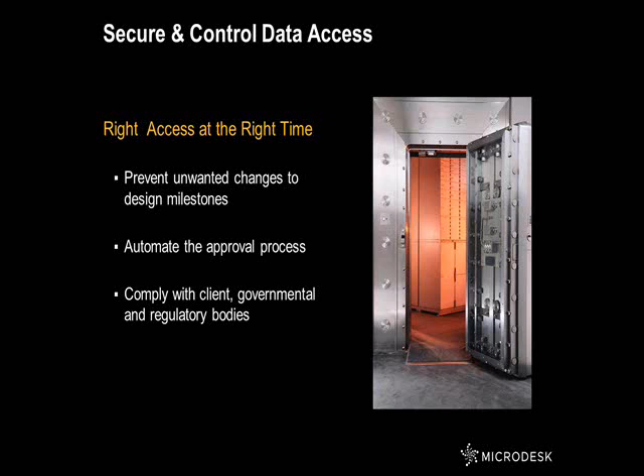The nice thing about Vault is that it centralizes your data. So it's a full data management software. It also integrates into Microsoft Office products, so it's good for not only Autodesk products, but also for all of your Office documents. It's really a whole organization solution.

Now, another thing that has been introduced in Vault Collaboration AEC is the ability to track milestones, so to move through the typical process of a project and actually capture particular milestones. So your 30%, 60%, 90% submittals can all be tracked through Vault.

Now, the other ability of Vault Collaboration is you are able to work across a very large organization. So you're able to replicate information across servers that could be housed in various offices around the country or even across the world.

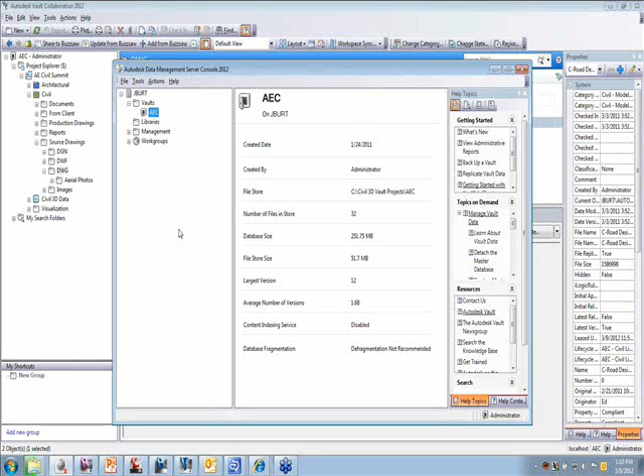Okay, so that's not really the interface for Vault. It's just, again, the admin application. Okay, the next part of Vault collaboration would be the actual client application that gets installed onto each client machine. So this gets installed locally, and it's kind of like Windows Explorer, but it actually allows for better interface with your Autodesk projects. So it'll give you additional information that Windows Explorer would not give you. And as we get a little further in, you'll be able to see that.

Another piece to Autodesk Vault collaboration is Buzzsaw. So when you purchase Autodesk Vault collaboration, you will also get Buzzsaw. You will get 10 gigs worth of storage. Buzzsaw's been around for a long time, but they have built in the integration of Buzzsaw into Vault.

So I can actually use this to collaborate with external clients. I can upload information into Vault and then have the ability for those external clients to grab that information, whether it be a reviewing agency or a contractor. You need to upload plans, and they can download them from Buzzsaw. So that comes with the product.

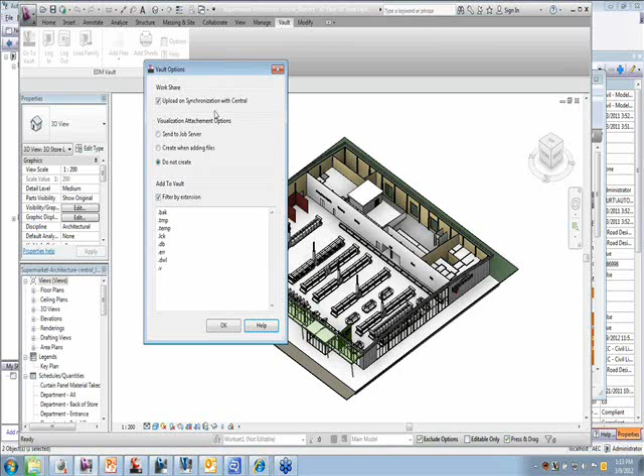Okay. Now, what I'm going to be talking about today is how it interfaces with Revit. So I have a model here, a Revit project file. This project file resides on my local machine, and obviously this would be synced back to my central file. I also have the ability to keep a copy of the central file in the Vault, so by coming into the options here, I'm able to synchronize my central file with the copy in the Vault, so I can house that in the Vault.

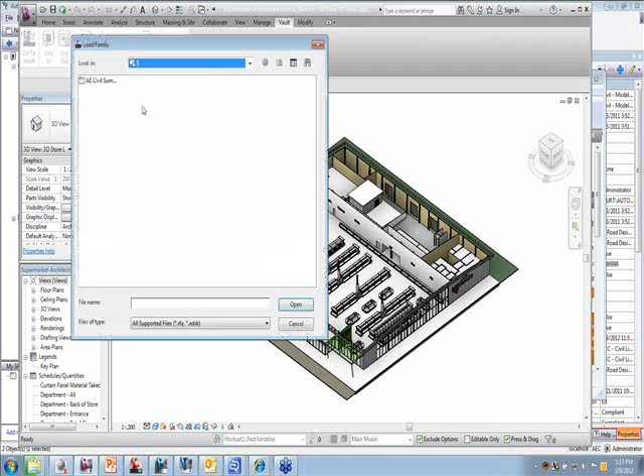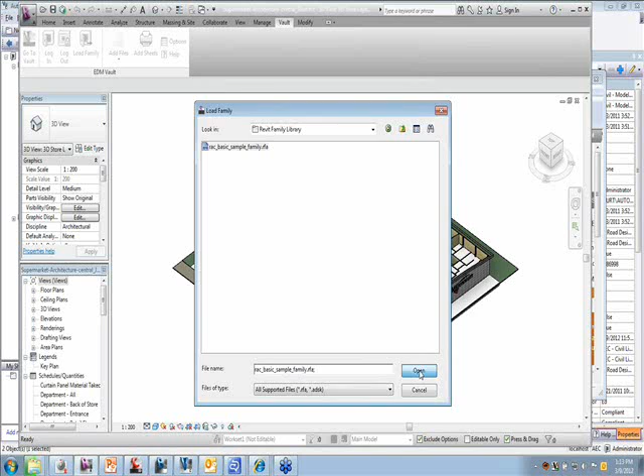I also have the ability within Revit to load families, so I could centralize the storage of my Revit families within Vault. So if I wanted to load a family into Revit, I could simply do that. Browse. This is actually browsing into the Vault now. And I'm going to import this table into Revit. And once I import that, I will actually have that in my project. And that was stored within the Vault, centralizing that library within the Vault.

Now, unfortunately, I don't have a good preview of that. I would actually have to come over into the Vault application and browse to it to be able to see exactly what that was. Okay, and there's my table for my family. All right.

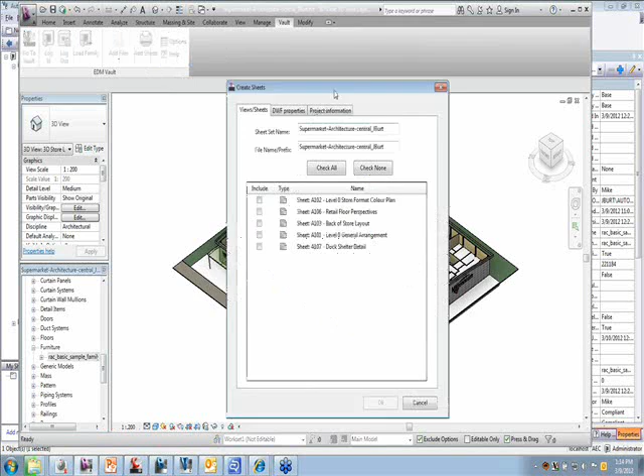Switching back over to Revit, another nice thing, this is available on subscription: I can also add sheets. So this is an additional plugin that I can install into Revit. And what I can do is go ahead and create all of my sheets and publish those out into Vault.

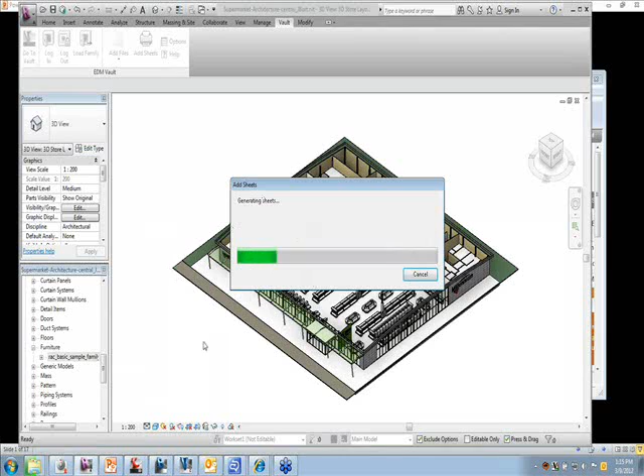Okay, so as you see here, I have gone ahead and published those sheets out into Vault. Oh, we're still generating, so I guess I am a little bit ahead of the program. There's my sheets, okay? I have the ability to preview those in here and also batch plot those.

Now I'm going to switch over into Civil 3D. The workflows between Revit and Civil 3D and AutoCAD are vastly different. Because they are different disciplines, the workflows are vastly different, and so the integration into the products is going to be different as well. And so I will get into the whole workflow within Civil 3D as well.

Now within Civil 3D, you can see I also have my ribbon for Vault. And the big thing within Civil 3D is I have a project integration, which will show here in my prospector in my tool space. And this allows me to work on a Civil 3D project seamlessly. So I can do all of my Vault functions right from my browser here in the prospector. Okay, I'm just going to log out and make sure that I am logged in correctly.

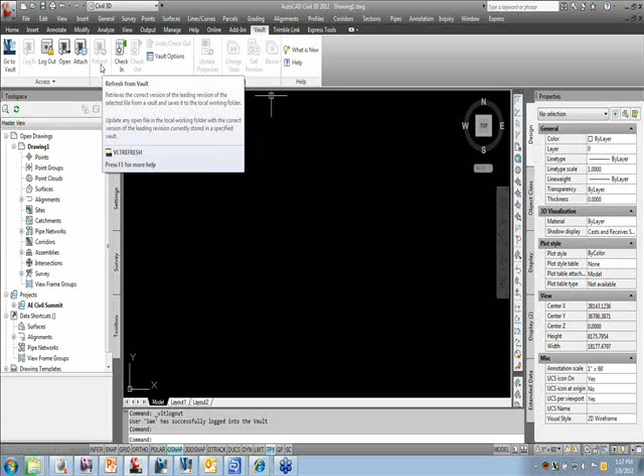Okay, I'm logged in. For today's illustration, we're going to be looking at 3 different personas. So I'm going to be illustrating a little mock project so you can see how the functionality works with Civil 3D. So I'm going to open up my local copy of a points drawing.

And so I'm logged in as Sam the Surveyor. We're starting from survey data, and Sam the Surveyor wants to import some points, and then he's going to be able to share those points out and create a surface, and then go through the design process. So what I'm going to do is go ahead and insert some points.

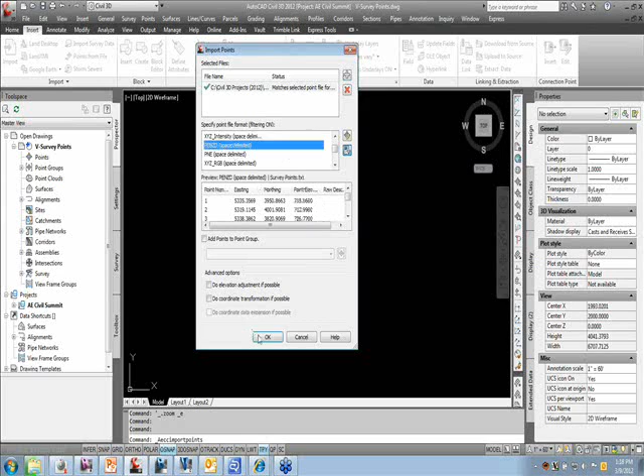Okay. Now once I insert those points, what I can do is I can add these points to the project. Now, if any of you are using data shortcuts, you would know that there isn't currently a way to manage points with data shortcuts. However, I have that capability to manage points within the Vault environment.

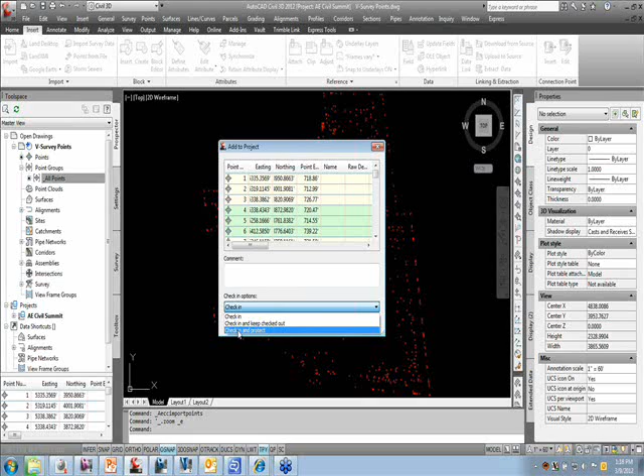So when I add those points to the project, I can actually check them in and also check them in with the ability to protect them so that those survey points are preserved within this drawing. Okay, so I'm going to go ahead and check those in, and those points will be protected. And you'll notice here in my Prospector that all of my points are locked within the vault. So again, it preserves that survey data, which is great. Okay.

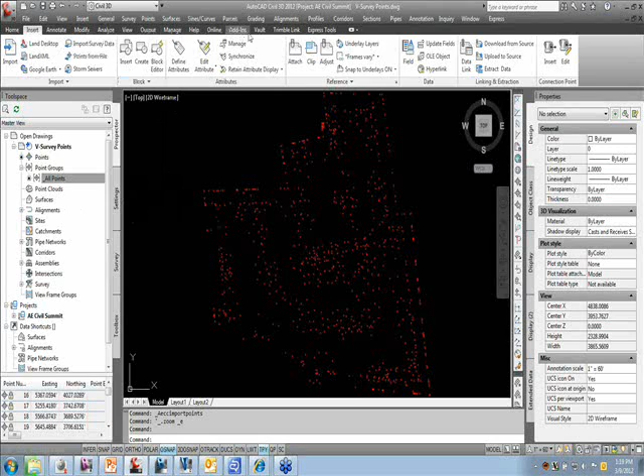So what I'm going to do is I'm going to check in this drawing, and the checking in process is me actually taking the drawing that resides on my local machine and checking it into the vault, so it's centralized in the vault. Okay. So in the check-in process, I can also create a DWF so that when it goes to be reviewed, that DWF would already be generated. For points, I'm not going to do that. Okay, so I'm going to go ahead and check that drawing in. Okay.

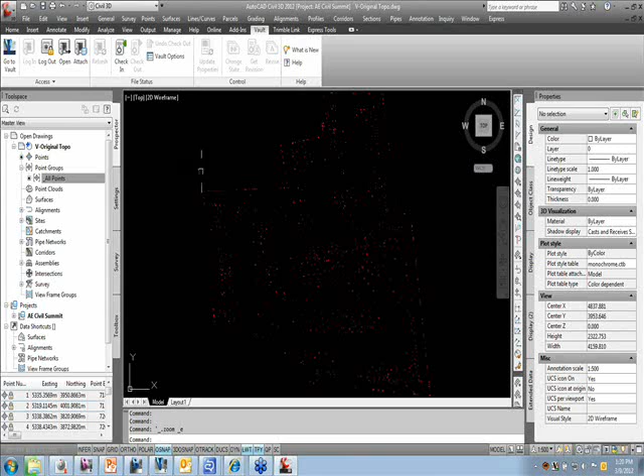Now what I need to do is I need to take another drawing, and I want to take those project points and I want to create a surface. So again, I have the ability now to take my project points out of my project and actually share them across the entire project. So I'm able to reference those same points in multiple drawings. Okay. So then once I add those points to the project, I can create a surface from those points. Okay. Now once I create that surface, I can go ahead and check that in.

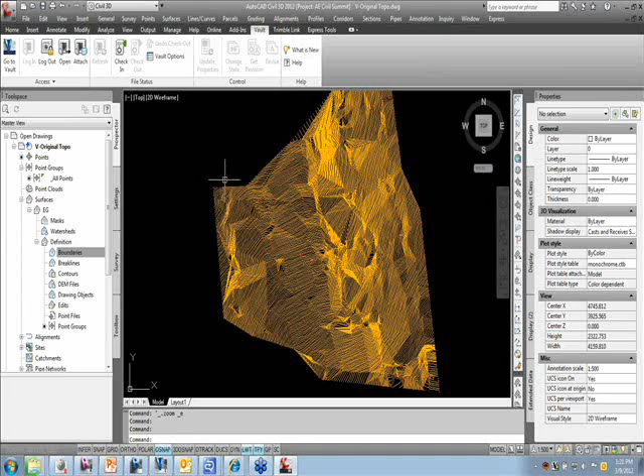Now the next step for today's presentation, the next person that I'm going to show here would be Ed the engineer. And Ed the engineer wants to take this surface after Sam the surveyor has worked on it and start to build proposed grading and proposed site features. Okay, but he's not going to have the ability to do that until it's gone through the appropriate steps within Vault. Okay, so what's going to happen is Sam is going to check this in.

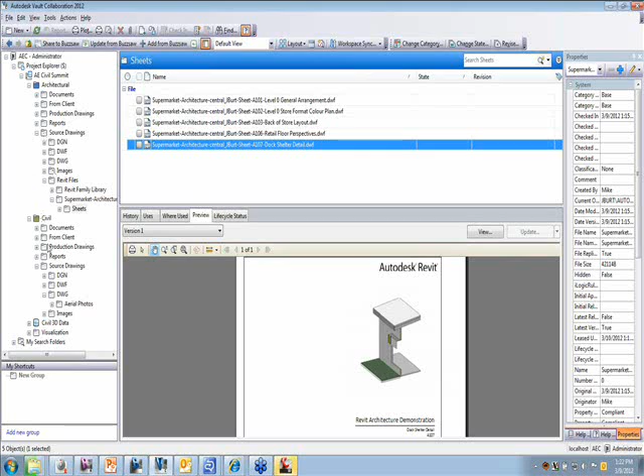Okay, and you can go ahead and check this drawing in. I have to check the data in because I still want to be able to take this surface and then be able to reference this in other drawings as well from the Vault. Okay, so I'm going to go ahead and check that surface in. All right. Now switching back into the Vault client, you will see that underneath my Project Explorer, I have my drawings collecting here in Vault Explorer.

And notice in the application, what we'll do is we'll actually log out as Sam the surveyor. We'll log in as Ed the engineer. Okay. And we'll look at the project. Now, this is the same information in this project. However, Ed the engineer cannot see the points drawing or the surface drawing because based on permissions, he doesn't have the rights to access those files because they have not been submitted or approved.

So what we're going to do is we're going to look at our topo drawing, okay? And this topo drawing, again, with revisions and life cycle states, will control who has access to what. Okay? So if Sam the surveyor is still logged in on the client application, what he can do is he can go ahead and submit this surface for review. Okay, so now that surface gets submitted for review and its state changes appropriately.

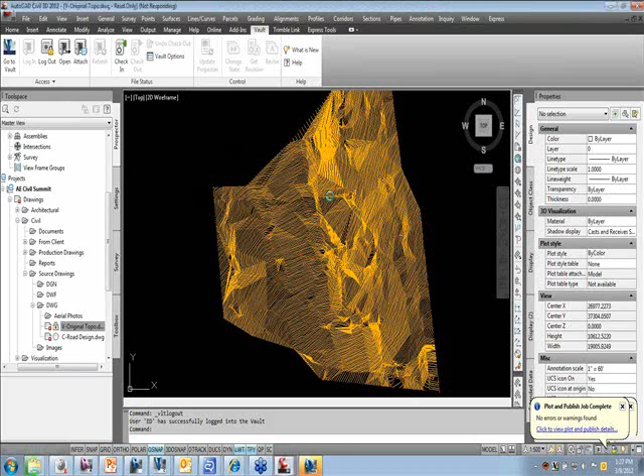Let me log out as Ed the engineer and log back in. And there is my topo surface now. So I'm able to open that up and actually start my proposed grading.

I'm also able to, with Vault, use the Buzzsaw integration I mentioned earlier. It's actually integrated into Vault, where I'm able to share out to Buzzsaw. So I can share this surface out to Buzzsaw, and what that does is go into a job queue, and every 15 minutes or so that gets synchronized with Buzzsaw, populating in my Buzzsaw account so I could share that information externally.

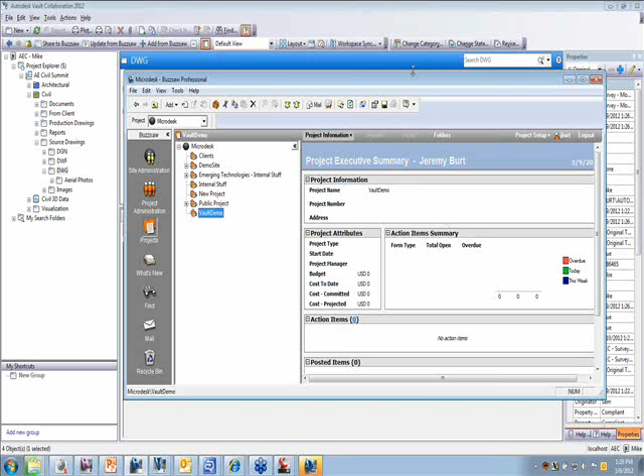That would conclude the presentation for today. So if anyone has any questions.